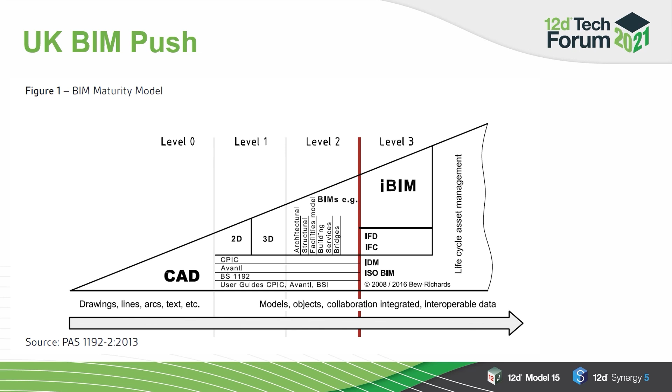What this set up though, and this was their sort of outline, is you had down at level 0 just drawings, CAD. Then you had some 2D and level 1, which had some 3D data. And further on down the track, they started to do more total models. But in that, there were no roads, rail, tunnels at all.

Now, I'm going to talk about two types of BIM, vertical and horizontal. But they're both civil projects. So why on earth didn't the IFCs to date in 2x3 cover both of them? So I'm going to look at the differences that caused all the concerns. Basically, a vertical project is confined to a small area, usually a building site, and then you go on up. You use a local origin, say 0, 0, and you measure distances from it. So you have small coordinates. And the distances are ground distances, the distance you get when you use a tape measure. A rectangular grid is normally used for setting out things, and the objects are 3D with a volume.

A horizontal project goes over kilometres, even hundreds of kilometres. We therefore have to use world coordinates, which are mapping coordinates, and they're in the millions. We need that because you need to be able to place your infrastructure project for roads anywhere in the world. You can't just take over the whole site that you're going to work on forever. The distances are what we call grid distances or map distances, and they're not ground units. So that's important. It's not the same as you get with a tape measure. We have to use linear referencing, where you use alignment and offset. Think chainage and offset, station and offset. And the objects are points, lines, tins, and 3D objects which have a volume.

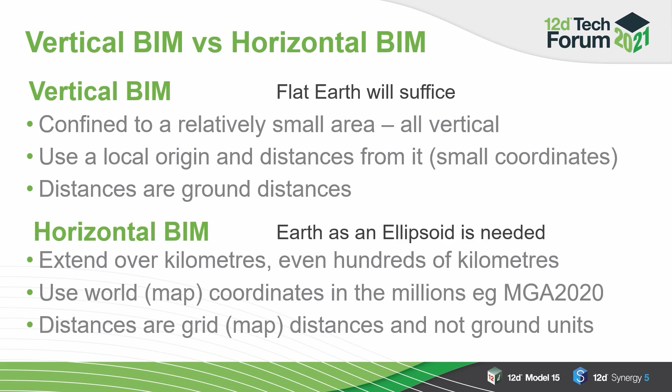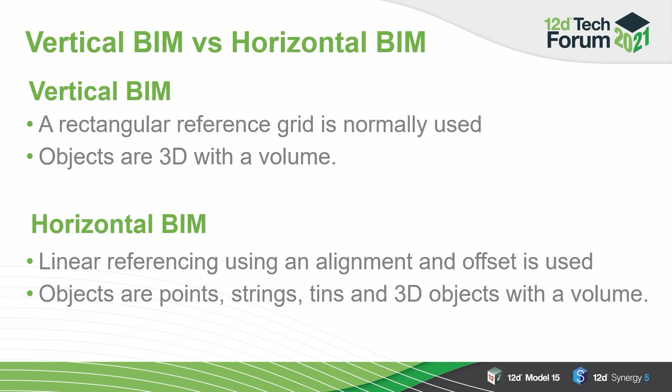Also, for vertical BIM, you have a rectangular reference grid, and your objects have 3D with volume. Whereas in civil BIM, your reference is usually an alignment and an offset is being used. As I say, there's all sorts of different types of objects, which points, strings, tins, alignments were not in IFC 2x3.

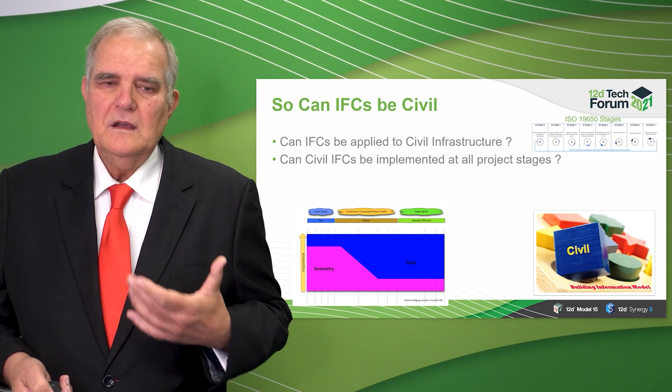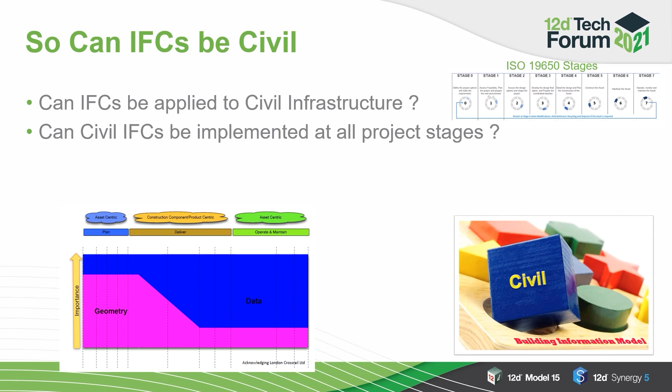Now, can IFCs be applied to civil infrastructure? Can they be implemented for all stages of projects? Because if you go to the Building Smart International talks, they talk about IFCs being used throughout the whole project. So if you look at your 19650s, it's got all these different stages mentioned. And what's needed over a life cycle of a project changes.

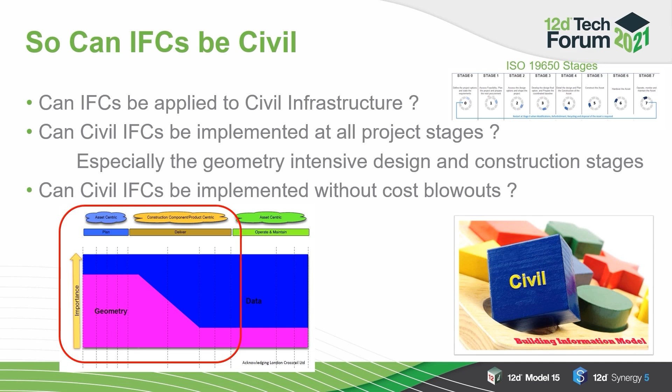Right at the beginning, up until it's actually constructed, you have a lot of geometry. Often after that, you only have lots of attributes. In fact, when you're going to asset management systems, sometimes they don't even take your geometry. All they want is a whole lot of attributes. So we're really worried about that early stage where it's thick on geometry. So can you also implement IFCs without cost blowouts? Because you really are trying to beat that project clock.

To be a civil BIM system, you need to support large coordinates. You need to handle long and large horizontal projects using map coordinates, not local coordinates. You need alignments with transitions and things. You need linear referencing. You need helixes for arcs. Now, why on earth do you need that? Why don't you just need an arc in 3D? Well, that's not what we use in civil.

A pipe is usually an arc when projected down onto the plan. Then your Z value runs up the side of that. So it's actually a helix. Not many people realise that. You need strings with diameters and without diameters. You have survey points, break lines, edge of roads and so on. Drainage pits and pipes. Null Z values.

Now people say, why wouldn't you want a Z value? Well, if you're a surveyor or someone else, you don't want to give it a Z value if you don't know one. Someone might believe you. Cadastral information, that usually doesn't come with Z values. So you don't want to give one. A name and coding system. Well, actually, in Australia, we've used that from at least 1980, codes for all the strings and objects.

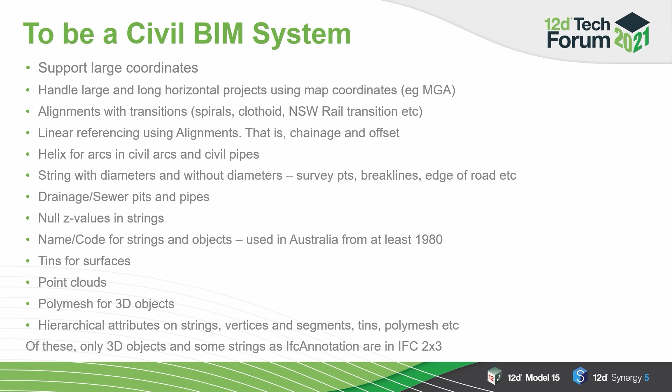You want tins for surfaces, like your ground surface. You need point clouds, since that's the way a lot of this data is now being picked up. You need polymeshes or trimeshes for 3D objects. And you want hierarchical attributes for your strings, vertices, segments, tins, polymeshes, and so on. Of these, only 3D objects and some strings were actually in IFC 2x3. And so that's what's been around for the last 15 years.

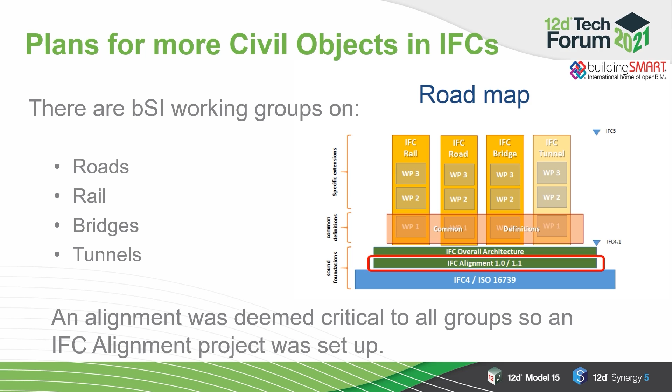So buildingSMART International were aware of this, and so they had a number of working groups looking at extending IFCs to civil. So they were working on roads, rail, bridges and tunnels. And what they realised, an alignment was deemed critical to all the groups. So an IFC alignment project was set up. Alignment 1.1 was the final one, and it had strings with more transition types including the natural clothoid and special rail transitions.

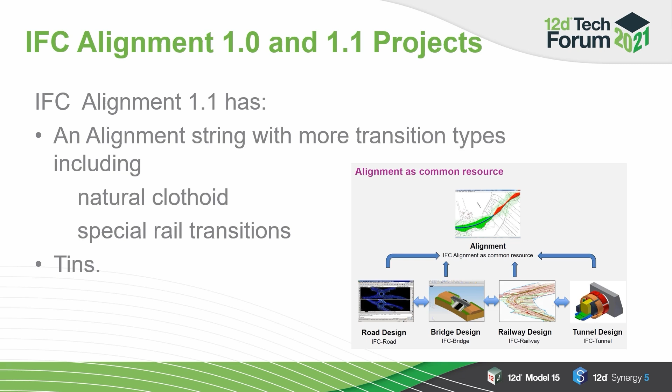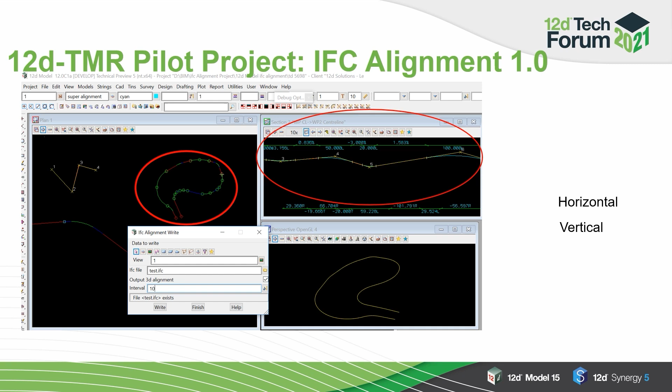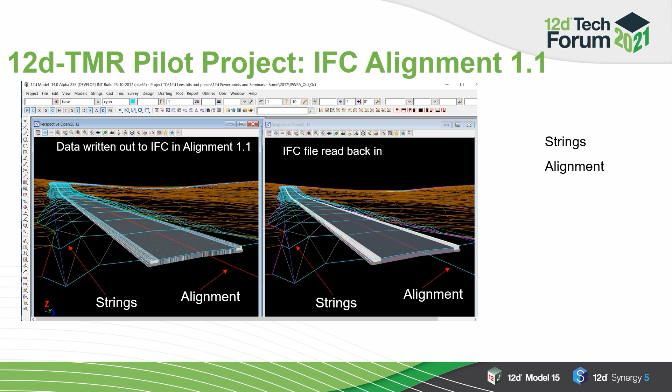It also had tins. And we're involved in that project with the main roads, and basically this is where we actually had read in an IFC alignment string with a horizontal and vertical. Remember, you can have horizontal without vertical, and also the 3D alignment. And we presented that in 2016. Then we continued on with this work, and you could again have strings and tins and alignments and the 3D objects that go with them, such as the road pavements. And basically that was in 2017. So that was alignment 1.1.

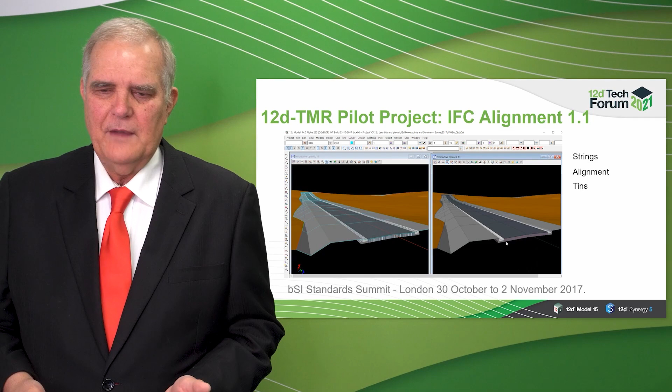And that's the whole thing written out again, read back in to show, yes, it's all there, properly. Now, what was the outcome of that IFC 4x1 project? Zilch. Although 12d Model and a number of software groups participated and successfully passed around alignments and tins, when IFC 4x1 was actually released, the traditional architectural BIM software vendors never implemented it, and the industry was left stuck with a 15-year-old IFC 2x3. What do you do in such a situation?

Well, a lot of people then start talking about digital engineering and wait for IFCs to mature. So what is digital engineering? Deja vu. Again, most people have no idea what it is. Luckily, Transport for New South Wales came to the rescue here and gave a bit of an idea of what it was. It says a collaborative way of working using digital processes to enable more productive methods of planning, design, and so on. And this is achieved by creating a common data environment, whatever that is, that aligns digital information, including CAD, GIS, 3D BIM, and so on.

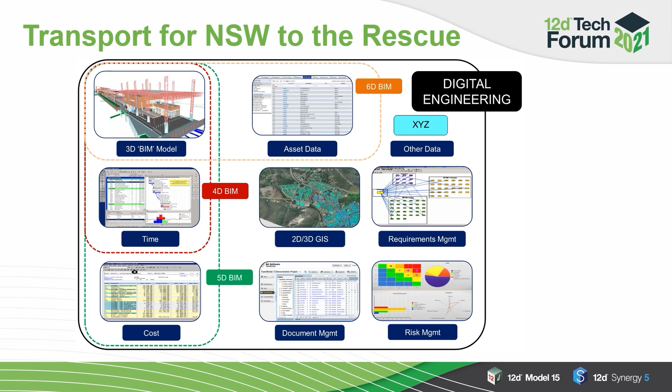So we did at least have something about digital engineering. And they even gave lovely plots or pictures, and you can see up the top there, you've got 3D BIM model, which we do in 12d Model, and next to it, you've got a whole lot of attributes, and those together are called 6D BIM. So 12d Model straight away is doing 6D BIM.

Now, do not despair though. Building Smart International has continued to work on the problem, and they came up with two things, the model setup IDM and also IFC 4x3. The Building Smart's model setup information delivery manual, what a mouthful, was then restarted and the project was started off again in 2016. John Mitchell from Australia was the lead. Then 12 nations were involved, including Australia, and I was part of that and produced a lot of the information for it.

It spelled out what ellipsoids, projections, and map coordinates are, also emphasised that civil projects must be in map coordinates, and said the vertical and horizontal datums and the map projections are stored in the IFC projected CRS entity. So it's right there for it. And IFC 4x3 extended this to any CRS and map projection, whereas the early ones didn't allow all the ones.

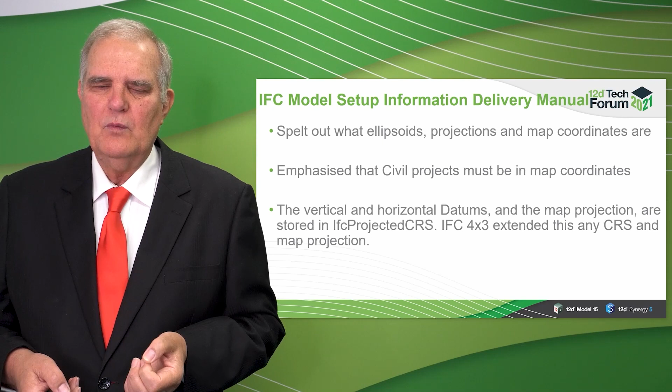Similarly, it also said how a 2D Helmert transformation could be used to bring small area sub-projects, which are in flat Earth local engineering coordinates, into your overall map coordinate project. So you've got a small one, and how does it fit with a big one? This is the big quandary, the big problem. And the required 2D parameters are stored in what's called the IfcMapConversion. So all that information could be passed over if you brought in such data.

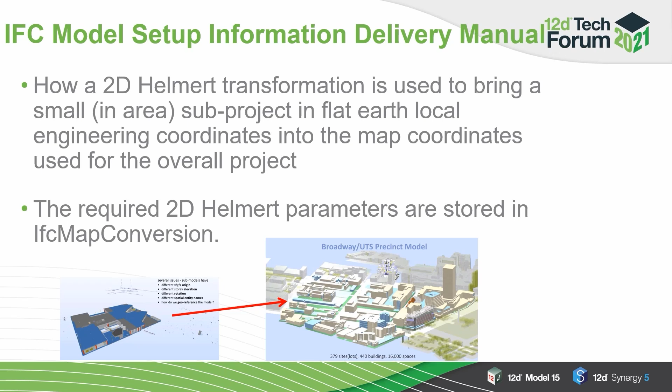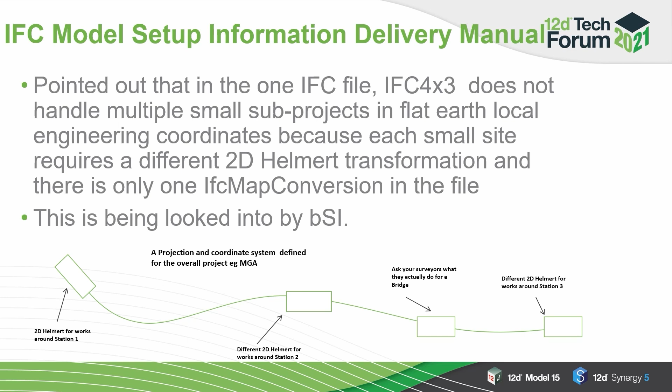It also pointed out that in one IFC file, IFC 4x3 does not handle multiple small sub-projects in flat Earth local engineering coordinates, because each of those sites needs a different 2D Helmert transformation, and for IfcMapConversion there's only one of them for the file. But this has been looked at by buildingSMART International. There's, again, plans for more civil objects in IFCs. Deja vu. It looks a lot like before, but this time it's going to be there for IFC 4x3.

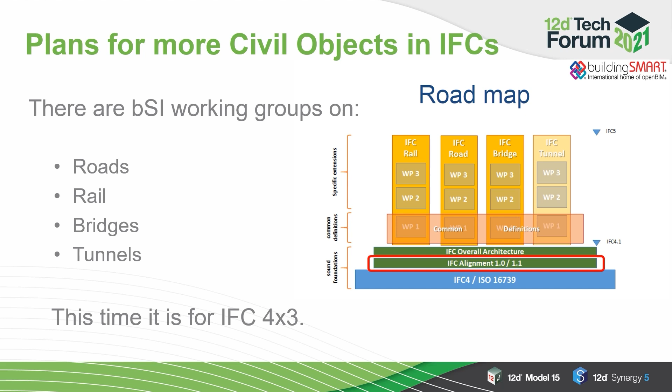So, actually, buildingSMART International working groups have been very active for the last 4 years or more on IFC 4x3, and it's now in the release candidate stage. It should be ratified and published next year. And the IfcAlignment is there, and it's actually been extended for IFC 4x3, and TINs are also in there as well. And linear referencing, which is not in the early one, is also in there. So most of those sorts of things we need are there.

So, to be a civil system, what do we have before? Large coordinates, always been handled by IFC. Yes, you can have long, large projects and know about your coordinate systems and everything. You've got your alignments, you've got linear referencing, you've got your helixes. You could use an alignment for that. You've got your strings with diameters. With diameters and without diameters, you have to use IfcAnnotation. I know that's strange, but it is there.

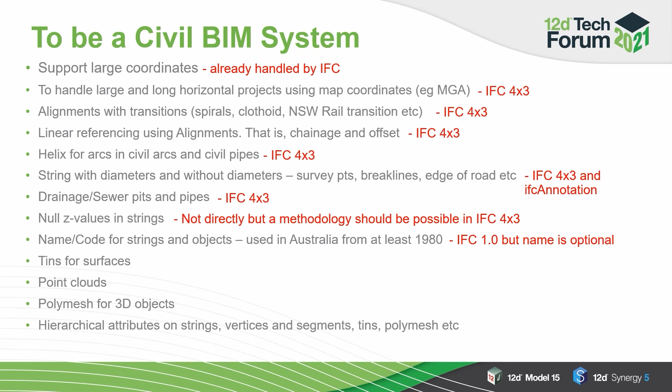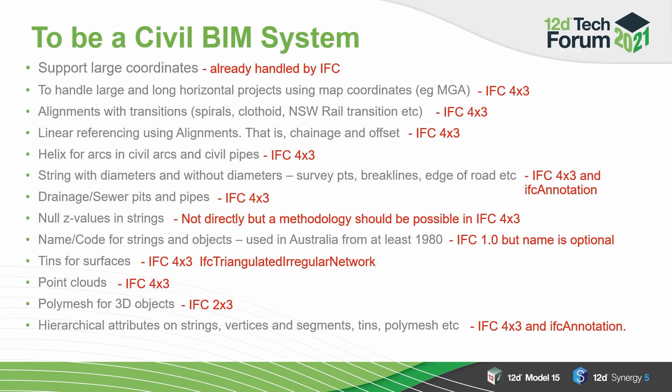You can have drainage and sewer pits, null Z values. That's not directly there, but I think we can come up with a methodology so we can handle it. We do have names in there, although they're optional. So in most projects you should be saying, I want those names not to be optional. You have to have them. We've got TINs, we've got point clouds. I don't think people realise how big they are. And polymeshes are in there from 2x3. And they've got heaps of attributes and things. And again, the tricky ones like vertex and segment attributes, we should be able to figure out how to do them in there.

So, will IFC 4x3 be more successful? Well, I believe it will be, because one thing that's happened is the Open Design Alliance, which we're a member of, has committed to implementing IFC 4x3. And that means over 2,000 ODA members will have access to IFC 4x3 readers and writers. So basically that should solve the dearth of software problem that killed IFC 4x1.

So with Civil BIM, the question really isn't how is it going, but why has there been so little progress? And the answer is actually very, very simple. It's called history. IFCs have been going around since 1996, I think they started. They grew up in a vertical world and only needed to address vertical problems. So the people involved in IFC were mainly working in vertical areas, for example, architects. And it was mainly the architectural software that was involved. And for buildings, you only needed flat earth and local engineering coordinates. So that's all they had to have.

But the last 7 years, we have been trying to work on IFCs for civil. And to date, though, not many experts from the civil authorities and companies, and only a few surveyors, have actually been involved in the nuts and bolts of IFC for civil. So that means the problem has still only been looked at from one direction, that of local coordinates. But it looks totally different from another direction when we're using map coordinates. So our goal is to have your information in IFC that works for both viewpoints.

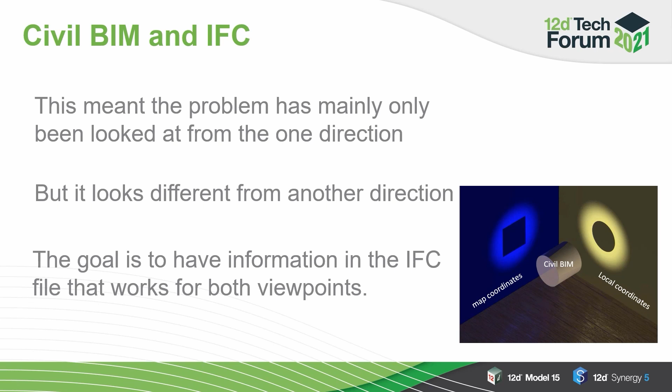Luckily, 12d Model is already a civil BIM system. What is missing in the industry is general support and understanding for project setups and the IFCs that you can use for civil BIM in, say, IFC 4x3. So yes, BIM and IFCs can be civil. It just needs civil knowledgeable people to help specify the geometry and, importantly, the attributes that you want in there, because not every geometry is to be used. There's all sorts of weird geometries in there that you can't use on a civil site, and to demonstrate how it can be done.

And you'll actually see in a lot of the talks in our technical forum, people are doing BIM models now, putting all the data in, getting it around, passing it through, some fantastic projects. They're all, though, mainly using IFC 2x3 because that's all the other software can handle. So surveyors and designers, Civil BIM needs you.